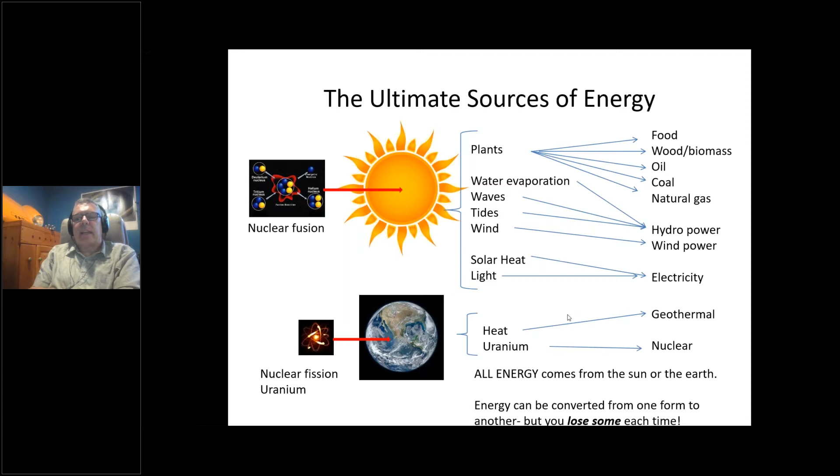So as we're probably all aware, there really are only two sources of energy that we humans can access. One of them is energy from the sun, either today or from a historical sun. And the other is from the energy of the earth, whether that be the materials of the earth like uranium, or the primordial heat of the earth, such as what we harness with geothermal energy. And the good news is we have this giant fusion reactor in the sky at a nice safe distance of 93 million miles away. So we can take advantage of it, or we can take advantage of the energy that it put up for us, or nature stored for us, over a long period of time. But this is really the ultimate source of all the energy that we use.

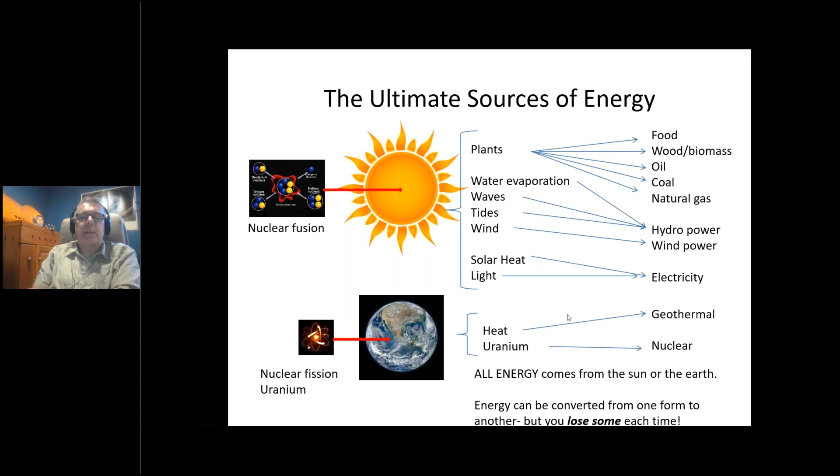And as we know, we can't really pull energy from nothing. We can convert one form of energy to another, but every time we do a conversion, we lose something. And so the laws of thermodynamics determine the transitions that we're permitted to do. And as I've said here, the zeroth law is that there's only one game in town, and you have to play it. There's no other game to play. And the first law says that you can't win. And the second law says that you can only really break even on a very cold day. And the third law, of course, says that there's an absolute zero, so it never really gets that cold.

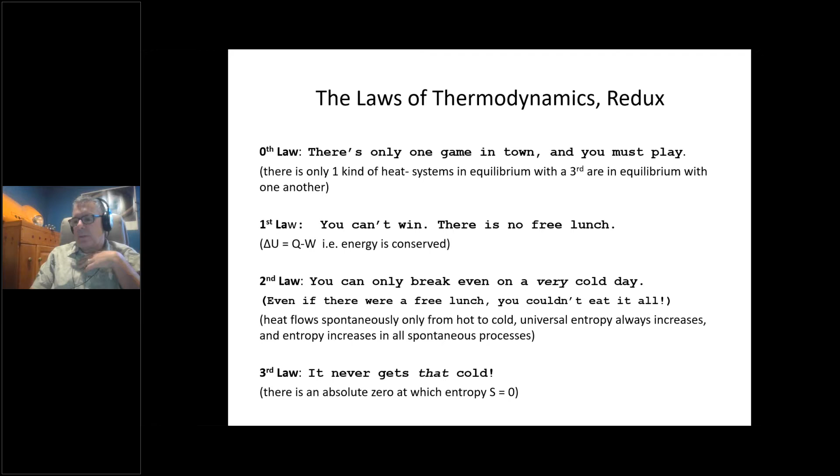So these laws are so fundamental and universal that, and what's fascinating about them is that they were discovered before we understood why they were true. So that frames all of our dealings with energy. We have to deal with energy in the context of the laws of thermodynamics.

Originally, we people had access only to the energy of our bodies, and as machines, we're about 15% efficient at converting food energy into mechanical work.

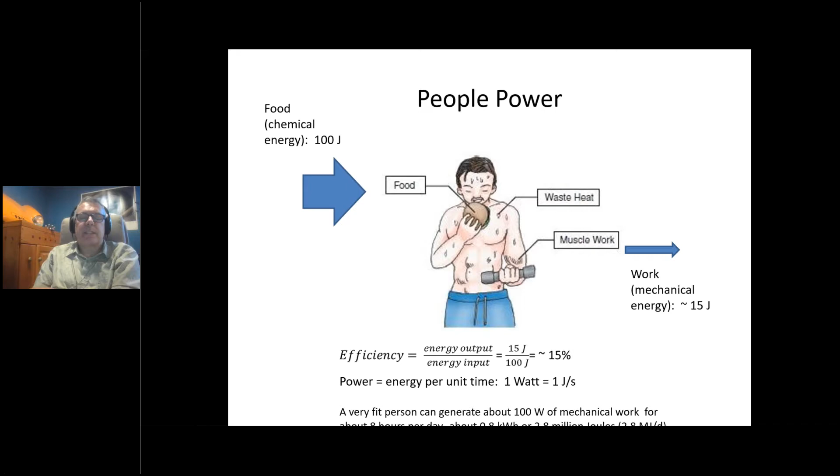We can be more efficient or less efficient, but it depends on the definition. For the largest part of our history, we only really had access to about 100 watts of mechanical work for 8 hours a day from each person. And that's it. That's all we had.

But eventually we got smarter, and we learned to exploit animals. Each animal is about 7.5 people. So one person could now take on the power of, say, 4 horses and use them for whatever needed to be done, moving things, digging, plowing fields, or whatever was needed. That was a huge improvement for us.

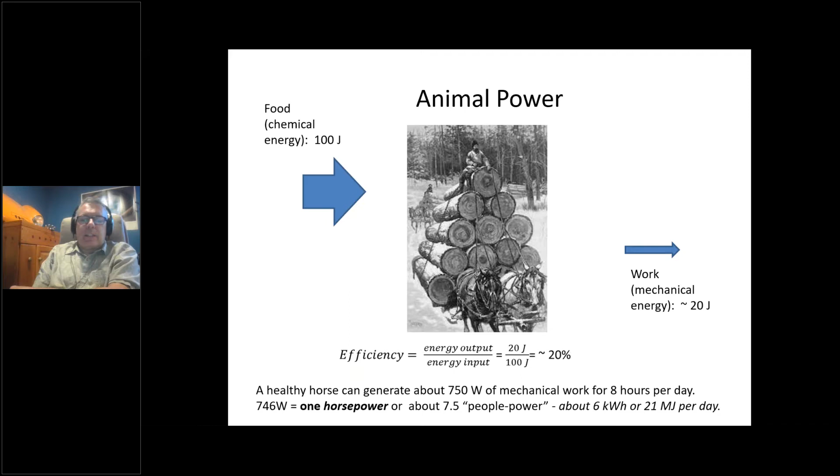As we learned to exploit the power of animals, we enjoyed that a lot, and used it more and more. The animals are around the same efficiency as humans, on the order of about 20% efficient. But the problem with horses or animals in general was mass consumption.

If we look at a city like New York City in the late 1800s, early 1900s, there were 175,000 horses in that city, with 2 million kilograms of manure per day. They were piling it high, several stories high, and shoving it into the harbor. The problems of horses in major cities were monstrous.

There was also a lot of people killed, they were quite dangerous, and their energy sometimes was not harnessed in the right way. Of course, horses also die, and when a horse dies and lays in the street, removing it is really a challenge. So the trouble is, horses make perfect sense in an agricultural environment where you can grow their food and the manure fertilizes the land. But when you try to put them in big cities, massive consumption equals massive problems.

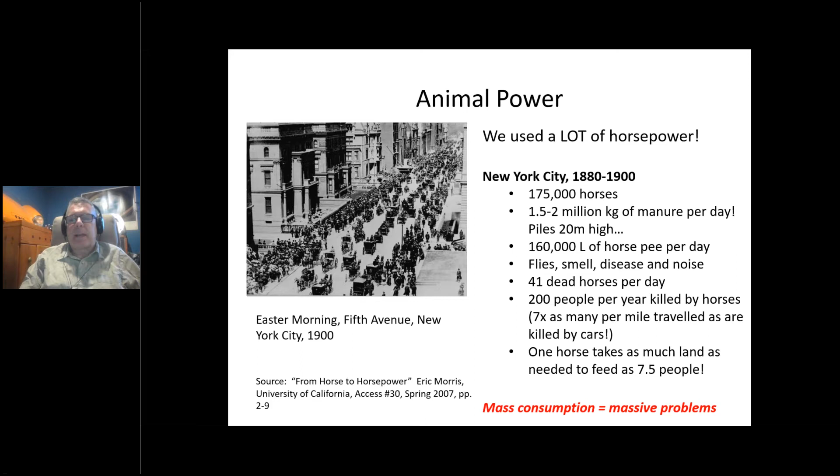So in the early 1700s, we started to effectively convert heat into work by means of heat engines. If you look at Newcomen's original engine, it was less than 1% efficient. But despite being only 0.7% efficient, what it did was miraculous, it removed the limitation of sustainability from our consumption of energy.

In the past, we were totally tied to either the sun or energy from plants derived from the sun. So we had to balance the desire to be warm in our homes against how fast trees could grow. That limitation of sustainability was a big issue for us.

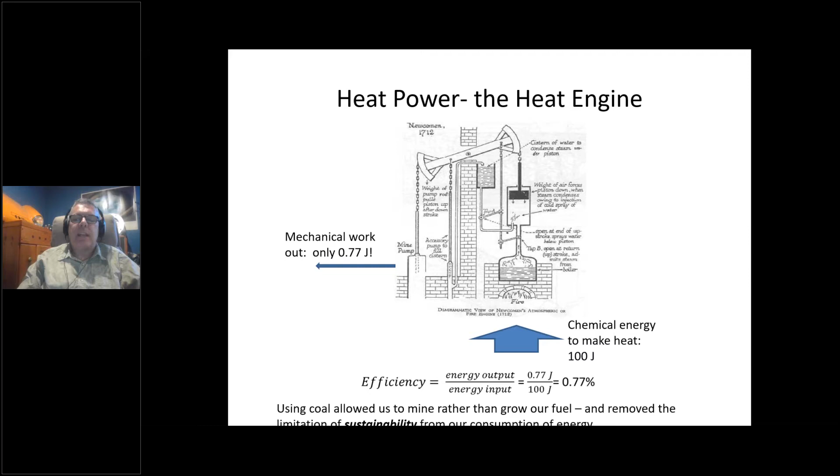Once we could mine coal, and in fact use steam engines to pump the water out of the mine so we could mine even more coal, we had a recursive technology for the exploitation of energy, in, unfortunately, an unsustainable way.

When you think about a heat engine, the way I like to think about it is like a waterfall that we put a water wheel in. The height of the waterfall, or the distance between the hot reservoir and the cold reservoir, determines to some degree the efficiency we can achieve through Carnot's equation.

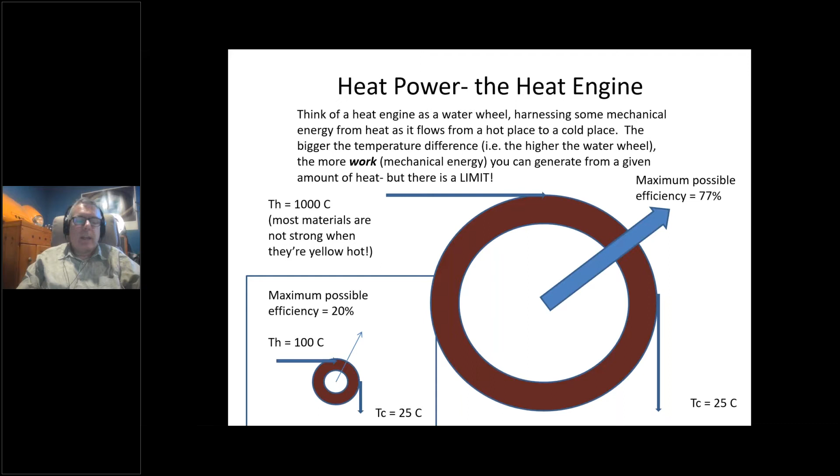But of course, that limit is a limit, and there's a limit based on materials of construction and so on, so you can only go so far. This is an amazing graph, a retired professor in Alberta put this graph together, and I kind of updated it.

This is the progress of heat engine efficiency versus time. The dashed line up there is an arbitrary 77% per Carnot, and we're already getting to 60% with combined cycle power plants. Even with large engines like ship engines, we can get to above 50%.

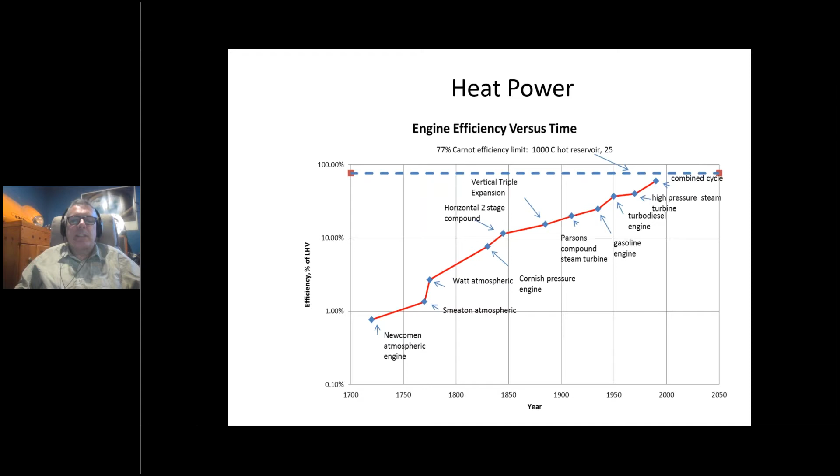It's really incredible. Another thing to notice in this graph is the giant jump between Smeaton's engine and Watt's engine, this is a logarithmic plot. So you can see why, even though Watt did not invent the steam engine, many people concluded that he did, because he made it so much more efficient than what was there before, by such a large measure in such a short period of time.

If we look at the gasoline engine, it's kind of the definition of the willingness of people to trade efficiency for effectiveness. The gasoline engine is not very efficient. We've managed over the years to make it more efficient, but it still really is not very efficient.

If we start with 100 joules and feed it to a typical internal combustion engine of the size used in a car, not in a ship, we're lucky to get 20.5% out the back end.

We lose about 18% or thereabouts just making the fuel, making the gasoline. And then the balance is lost by the engine as heat. It's rare that we tolerate processes that are so inefficient. But the reason we tolerate it in this case is that its efficiency is poor, but its effectiveness is really great. It's a liquid fuel, easy to transport, easy to store, easy to transfer quickly into the tank so you can refuel quickly. So it's the triumph of effectiveness over efficiency.

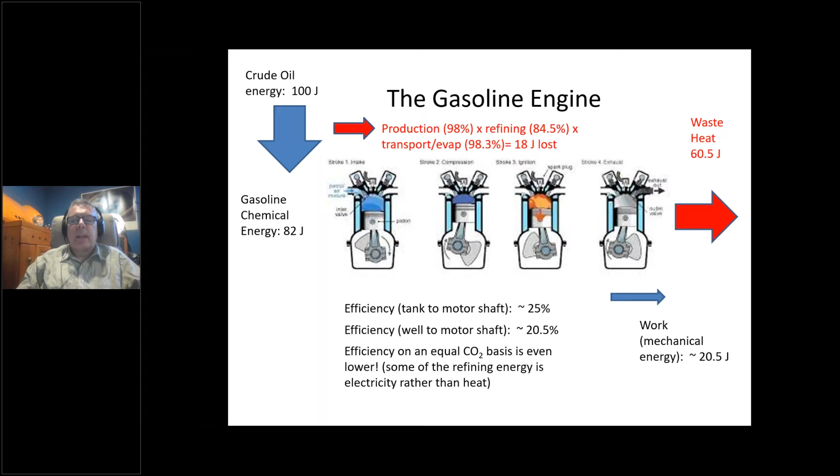And if we look at the various uses of energy in a vehicle, you can see the engine is by and away the largest waster of energy. In this instance, per this figure, 77% is lost as heat by the engine.

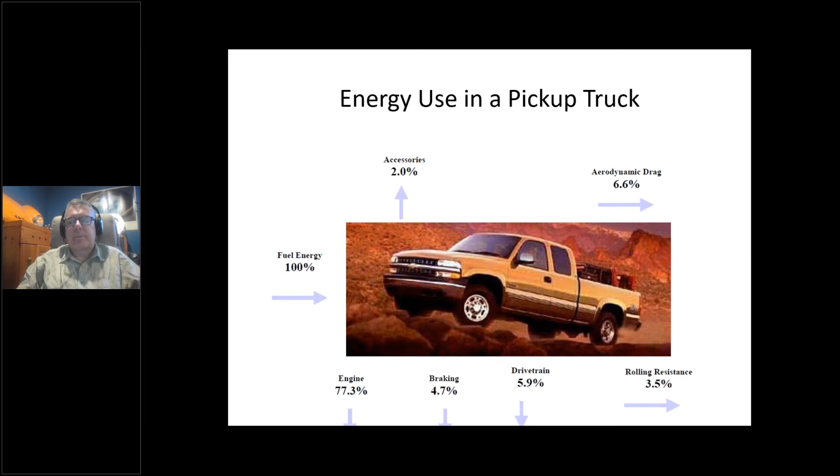But of course, the car, just like the horse, was a miracle. And I like to tell this story in the context of my father. My father was born in 1915, and he passed away in 2015 at 100 years and 1 month old. And you can imagine how different the world was between when he was born and when he died.

But when he was a young fellow, they were still plowing the fields on the farm with horses. And when he saw his first gasoline engine tractor, he was just completely amazed by this thing, because when it broke, you could fix it. You didn't have to shoot it. With a horse, if it steps in the groundhog hole and breaks its leg, there's no healing it. It's the best you can do is maybe use it as food, or send it to the glue factory, but the utility is gone, and they were also very difficult.

They didn't like to go where you pointed them. If there were two horses walking together and one had to walk in the soft part of the field that had already been plowed, and one got to walk on the hard part of the field that hadn't been plowed yet, that was easier. So both horses wanted to walk on the hard part, and they kept pulling and pulling. You had to keep pulling them back. So this car, this tractor, which went where you pointed it, was like a miracle.

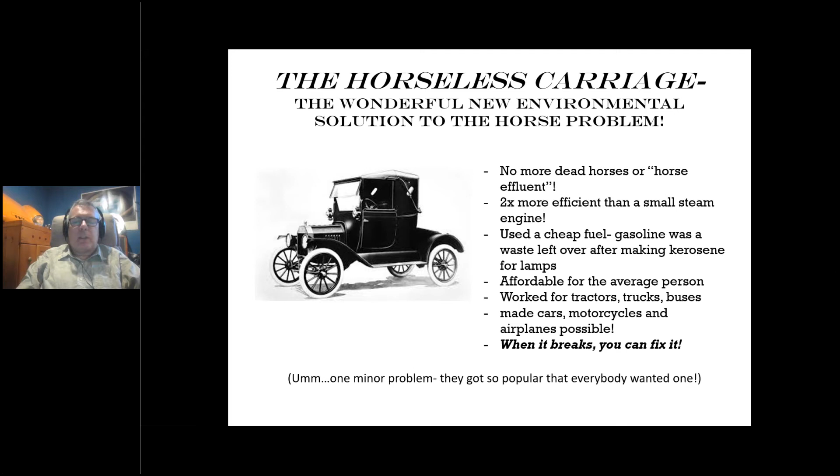So my father decided, this is the future. I'm going to become a mechanic. And a lot of people concluded the same thing. And of course, the mass exploitation of cars became the problem.

Well, here we are. At the same time, around the time my father was born, electric cars were as popular as gasoline cars. And in fact, they were the fastest thing on the road too for some time. As you can see, this Belgian fellow with his car that he called the Never Satisfied, La Jamais Contente, went as fast as 66 miles per hour at the turn of the last century. And the peak sales were about 200,000 electric vehicles. But of course, the superior technology of gasoline won in the end, because battery technology was just not up to the job.

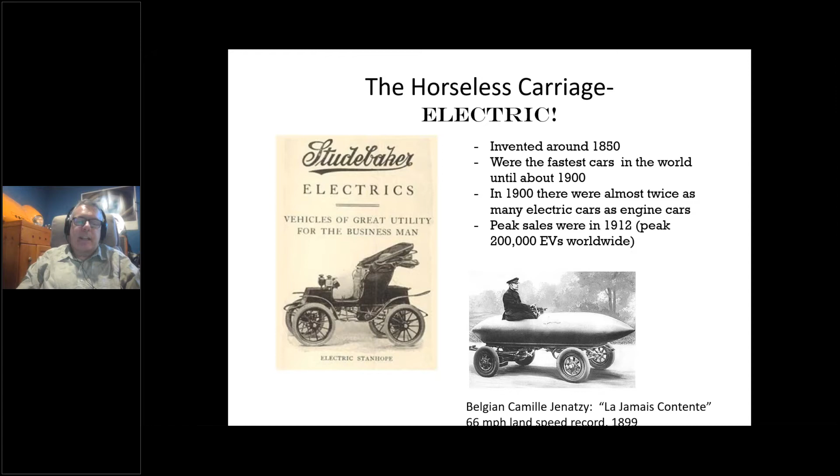When we look at the electric car, the amazing thing about it, though, is efficiency. Remember, we were talking about from energy source to wheels, or not to wheels, but to motor shaft. In the last example, we were talking about 20%. Well, this is now almost 75%. And even if we have to make the electricity from a fuel by a combined cycle power plant, it's still 42%. So we're talking about a gigantic gain in efficiency. And the nice thing about gains in efficiency is they mean reductions in cost ultimately, but they also mean reductions in environmental impact. And that's the real benefit of electric cars.

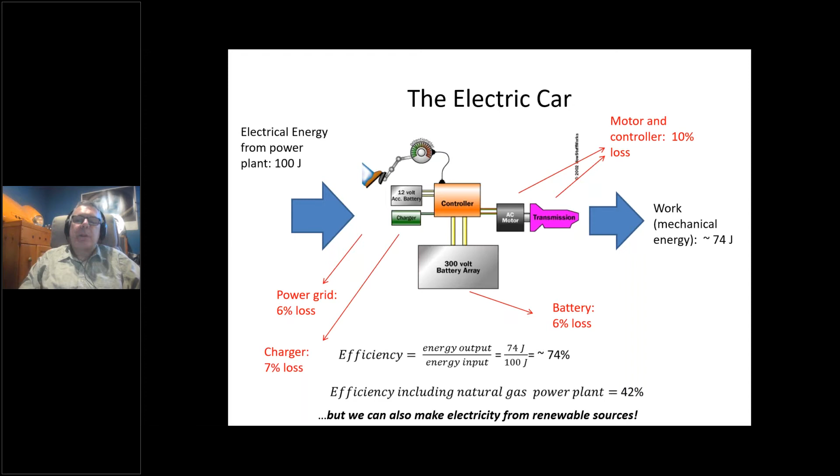Now, the big competitor in recent years has been hydrogen. And as a chemical engineer, I have a long relationship with hydrogen. Hydrogen is an old friend to me. I've been making and using hydrogen for 30 years. And the problem with hydrogen is that it's hydrogen. Unfortunately, hydrogen's properties as a molecule and its thermodynamics limit how effectively it can be used as a fuel, whether that be for heating or for transport.

Many people say it doesn't matter because in the future we will make electricity from wind and solar so cheaply that it doesn't matter if we make it efficiently. The trouble is, of course, that efficiency goes to cost, and all of these steps have capital associated with them, which makes them costly. So the trouble with the electric car fueled by hydrogen instead of by recharging a battery is its poor efficiency leads to high cost.

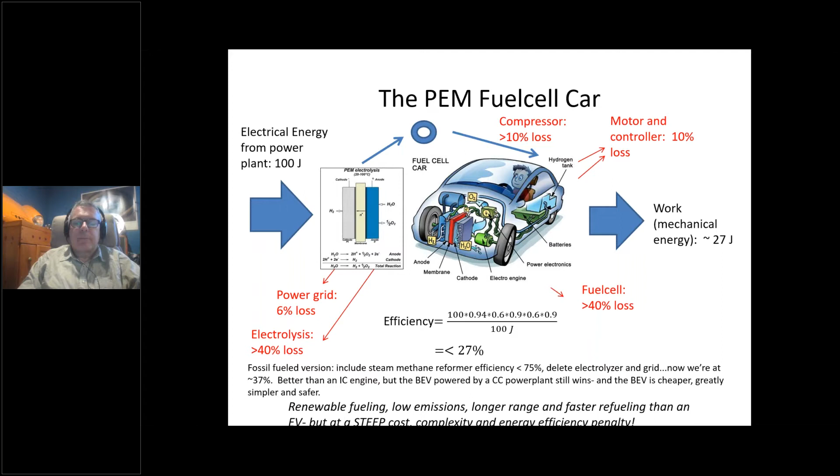So why did the electric car fail back in the 1910s and 20s? Well, originally, when there were only 20 good miles of road in the whole community, it didn't matter to have a range longer than 20 miles. It made no difference. But once they started building roads and better roads and making them longer, range started to matter. And the great thing about gasoline is its energy density per unit mass and volume is exceptionally high, despite the poor efficiency of the engine.

And it's also very effective, as mentioned—you can distribute it very easily. So in North America, every little corner store in the countryside became a gasoline station overnight. And all of a sudden, everyone wanted a car, and Henry Ford's mass production ensured that they could afford one if they wanted it.

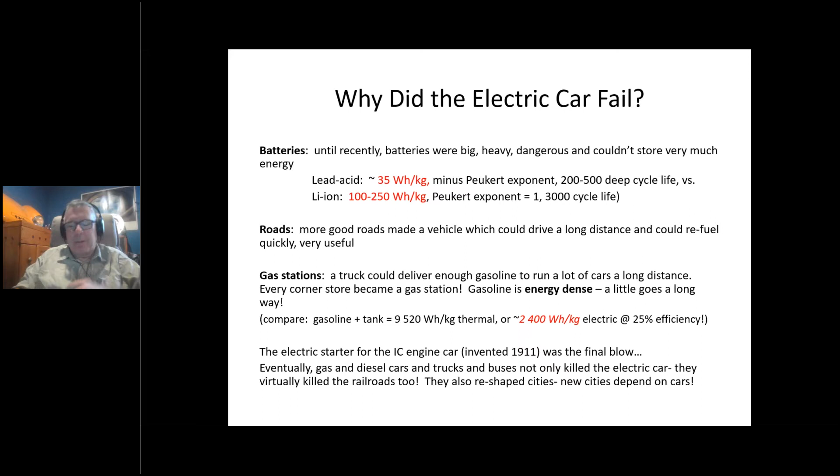And the final blow, actually—electricity, in a sense, had a hand in killing the electric car, because the original cars were started with a crank. If you did the cranking wrong, you would break either your thumb or your wrist when the car backfired or started and you didn't disengage the crank quickly enough. So a lot of people, especially women at the time, were not comfortable with an engine car. But then the electric starter in 1911 meant that you could just push a button and the car would start, and the rest is history, as they say.

So why do we need the electric car now? What's changed? Well, the big thing that's changed, the huge invention that made the electric car now make some sense, is the invention of the lithium-ion battery. And it's really two things: one is the lithium-ion battery technology itself, and the other is the fact that we have these little devices.

Cell phones and laptops and so on, mobile devices, were so valuable to us that we were willing to pay $3,000 per kilowatt hour for the initial batteries when lithium-ion was invented. And that consumption of very high cost batteries initially allowed the production of those batteries to increase, and they provided what's called a path to scale that ultimately gave the lithium-ion battery the possibility of becoming cheap enough that you could imagine using it in a car.

But the real motivation here is climate change. We really need to deal with the emissions from burning fossil fuels. We didn't know about that officially until about the time I graduated from university, about 30 years ago. But for the past 30 years, we've known and we've done nothing, or almost nothing. And the electric car gives us an opportunity to do something without paying too much of a cost for doing so.

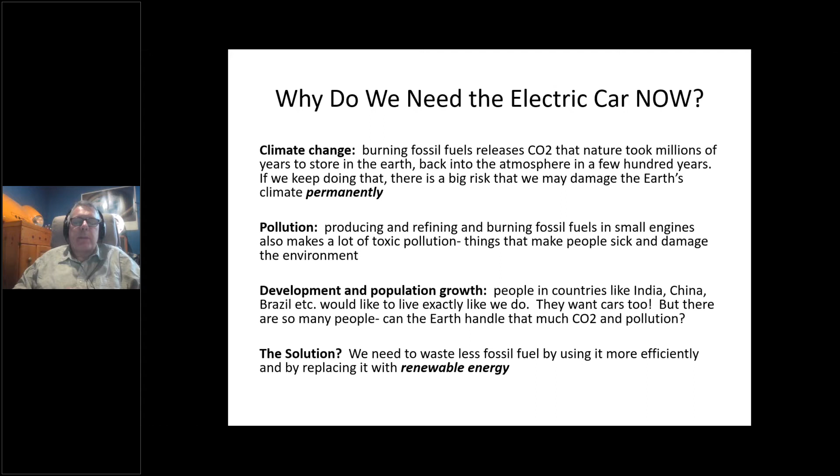Of course, the other thing is that right now we're exploiting cars, but there's a huge fraction of the population of the world that has no access to that technology because it's too expensive, and they would like it. If we expand the role of cars in the world to the entire rest of the world, as one would expect we ultimately should, the burden of fossil fuel emissions and toxic emissions would be tremendous. So ultimately, to deal with all of these problems, we need to transition to renewable or non-emitting forms of energy, and the electric car's efficiency greatly helps with that.

This is reality, so we have to cope with it. We had a great party for 300 years on the stored energy of the sun in the form of fossils, but the party's now over, and we have to sober up, clean ourselves up, stop mourning, stop denying it or bargaining with the problem, and get on with solving it. Electric cars are definitely part of that solution.

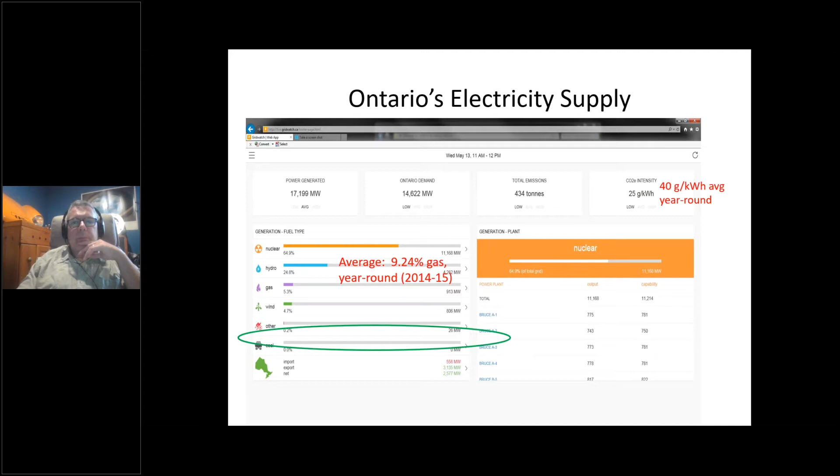Of course, I'm very fortunate. I live in Canada, and 80% of Canadians have access to a grid like mine or better. My grid is only 40 grams of CO2 per kilowatt hour because it's mostly nuclear and hydro with a little bit of wind. What remains is natural gas at a fairly small percentage, about 9% year-round average, and no coal. We burned our last coal in 2014. So in Canada, we have a beautiful grid, and that makes electric vehicles, when you have a grid like this, which is the envy of the world, really become an obvious choice, what we'd call a no-brainer.

He does a very clever set of evaluations looking at what the transition to renewable, non-emitting, or sustainable energy will take. He calls it Sustainable Energy Without the Hot Air, and it's a refreshing look. Although he does do one thing I think is quite wrong: to make the analysis simple, he takes every bit of energy, whether heat or work, and converts it all to joules, or kilowatt hours per person per day. By doing so, it's almost like he's committed what I call the first sin of thermodynamics. He's sinned against thermodynamics because heat and work have the same units, but they're not worth the same. It's like comparing American dollars and Jamaican dollars just because they're both dollars. They're not worth the same.

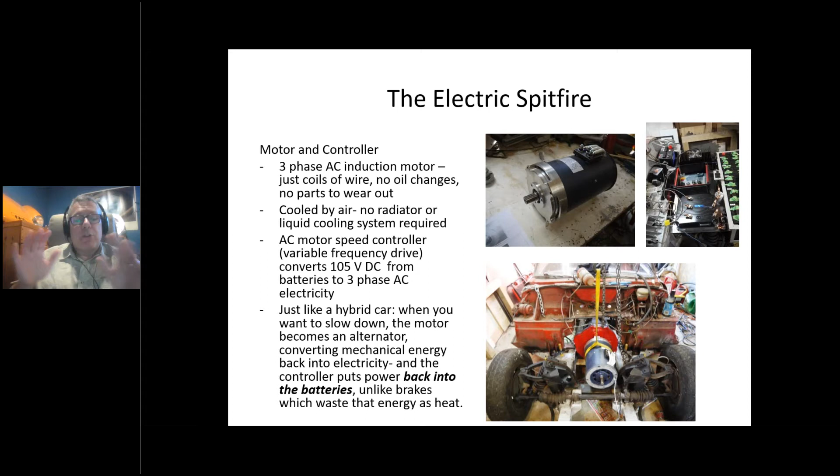Being a chemical engineer, of course, I was very interested in the batteries. One of the things I wanted to do for the project to be considered successful was to ensure that I got good data out of the energy efficiency performance. So I made sure that I could accurately measure how much AC electricity went into the charger and how much DC came back out of the battery, so I could do accurate calculations.

The beauty of lithium-ion batteries is that they're extremely efficient. They're higher than 90% efficiency once all the ohmic and polarization losses are figured in. The other great thing about them is that the process is very gentle. It's just lithium ions moving from the anode to the cathode and back again. The volumetric changes in these materials between charge and discharge can be managed such that they're not very great, and as a consequence the battery can last a long time.

At the time, my batteries were warranted for about 2,000 to 3,000 cycles before they lost 20% of their capacity. Some that I bought recently for a solar project up at my farm were rated for 4,000 cycles. So the cycle life of these lithium iron phosphate batteries is really quite exceptionally good.

When you look at what the batteries look like, they're layers of anode and cathode with a plastic separator between them, and that space is filled up with an organic solvent that has lithium hexafluorophosphate dissolved in it, and the lithium moves between the anode and the cathode and back again between charge and discharge.

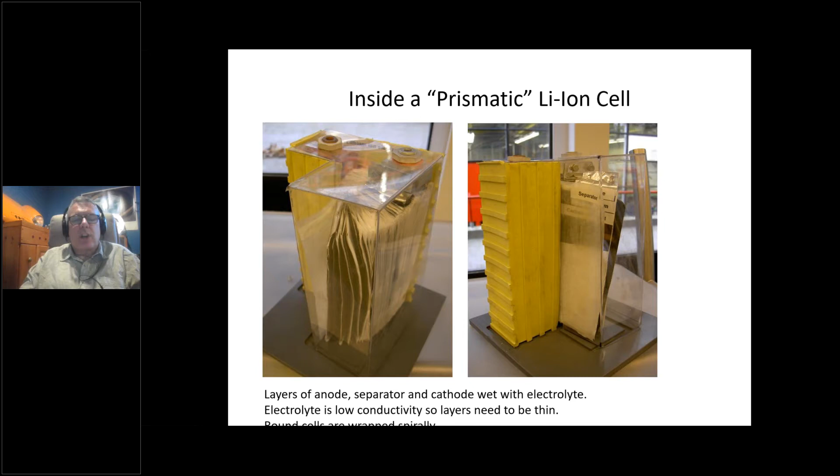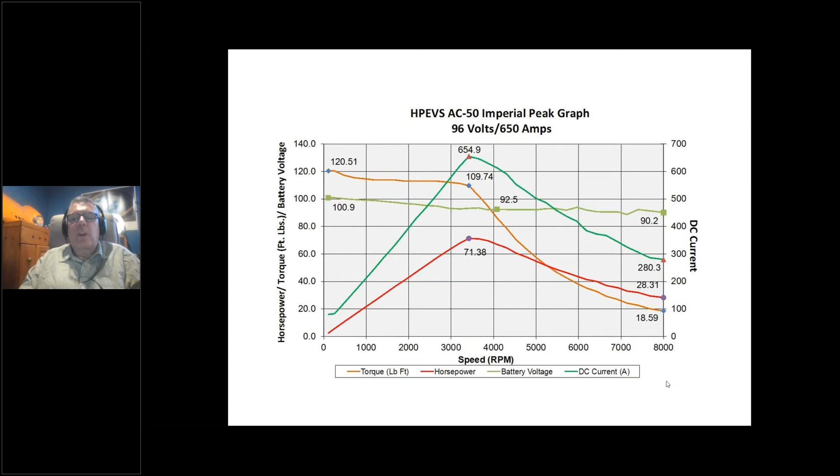So here's kind of the key slide from the point of view of the decarbonization guy, from my perspective as somebody really interested in energy. I compared the gasoline engine Spitfire, the original one with its 1.5 liter Leyland engine, against both my Prius and against the car converted, which I called the E-Fire. You can see that the energy used from source drops rather dramatically by virtue of that efficiency, and the CO2 emissions from source drop by 97%.

I mean, that's just incredible. It's not zero, but it's pretty close. So imagine, and that's comparing it to this Prius - I own that car, and that's my real performance. It's 94% better than my Prius, which is the best gasoline engine car you can buy in Canada that doesn't also have a plug. So there's no comparison here. The performance is absolutely incredible.

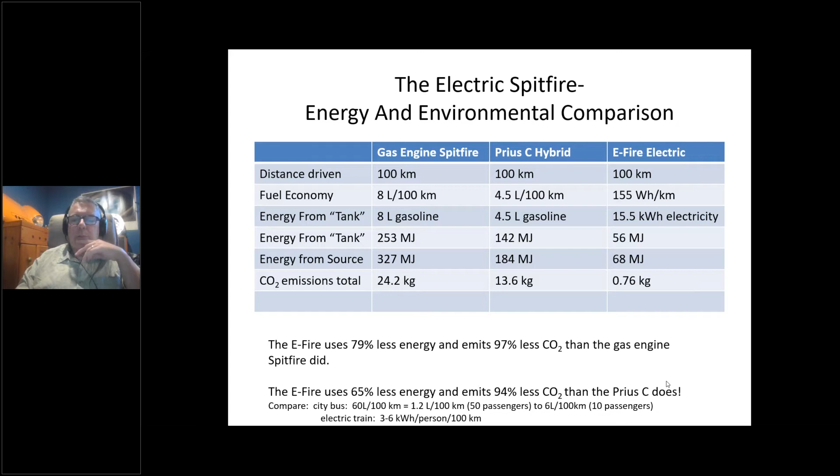On a money perspective, without carbon taxes, it's still a little bit hard to justify, but that's why the government gives some incentives if you buy new proper electric cars. Of course, they gave me nothing because this conversion process is not something they really care about or approve of. They're really interested in people buying cars from Nissan and Tesla and companies like that making them.

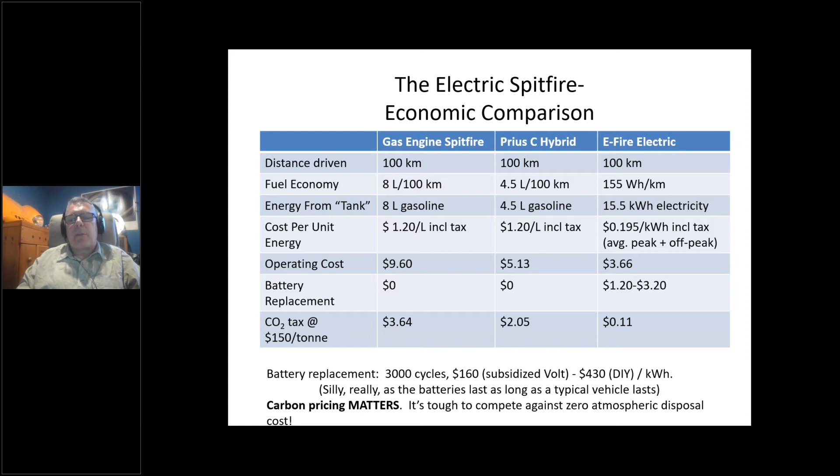So here we go. Here are some pictures of the progress of the job while we were doing this.

This is in my garage at home, and you can see it's not very neat and tidy, but that's okay because we are all about results here.

So here I'm pulling the engine. My son is helping me disassemble things. He was 11 years old at the time.

And there I'm holding the gasoline tank. Imagine this 80 pounds of gasoline, 10 gallons, around 40 liters, was right behind the seats of the car and separated from the driver and passenger by about a 3mm thick piece of paperboard with some vinyl covering on it. And it had a flip top lid with just a little clasp to hold it down.

So getting rid of that gasoline tank made me feel a lot more comfortable in the car. But of course, remember, this car had been sitting outside underneath the tarp for a long time, so it was in very bad shape. So the very next job after we got rid of the engine was we had to lift the body tub off of the chassis or frame in order to restore both the body and the frame.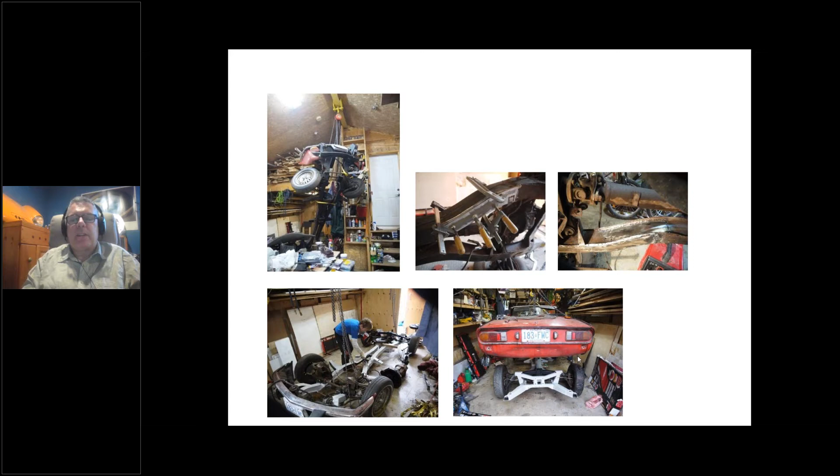And there my son is painting the chassis with epoxy. And then we had to put the body tub back onto the frame, because the body tub was in even worse shape than the frame.

And by this point, one of my problems is that I'm kind of a cheapskate. I don't like to spend money unless I have to, and sometimes I'm foolish that way, and I spend effort instead of money. So whereas you can buy some of these body panels still for these cars, I had to do the hard thing of bending little sheets of steel and welding them together in order to do these body repairs. I made my own floor pans for the car to replace them because they were completely gone.

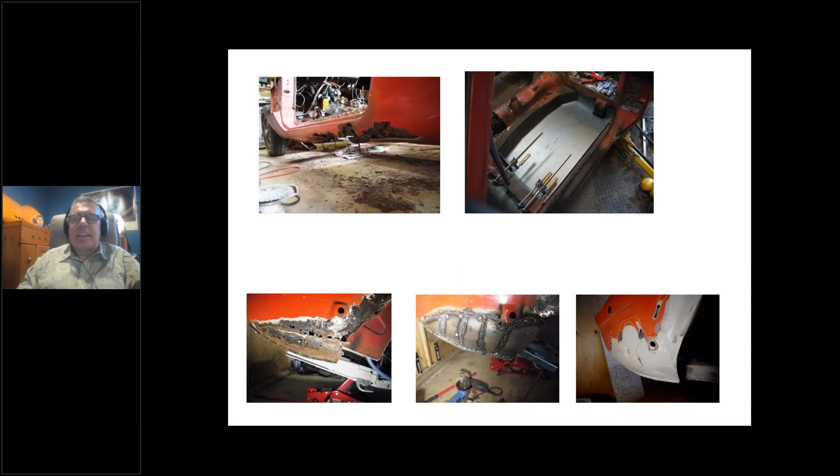And you can see lower portions of the car were in very bad shape. They'd corroded away. In fact, this was a repair that someone else had made, and they didn't understand chemistry very well, because they used bronze to braze in the repair, and then the bronze and the steel set up a galvanic corrosion cell and corroded away the steel over the subsequent years.

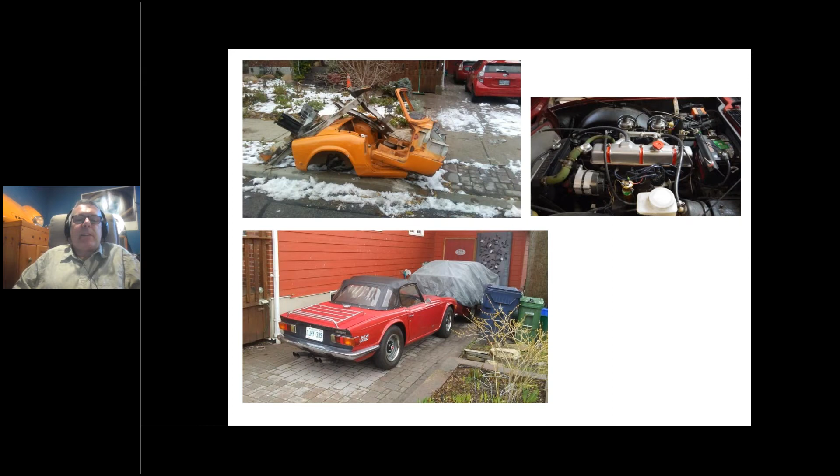Of course, cutting the car up into little pieces so that the scrap dealers who rove around the neighborhood would come and pick it up - that was one of the most hurtful things that I did. And if you're attentive, you'll notice in the background there's a piece of the hood of the car up in my office here.

But as things would have it, by luck, none of the electric stuff in the car was damaged at all - it was in perfect condition after the crash. And on top of it, I managed to get a settlement from the insurance company that allowed me to keep the car. So all of that electric stuff just sat in my garage.

And then I bought another British car. Being kind of foolish and in love with British cars, I bought another one - a 1973 Triumph TR6. It had a great big 2.5 liter straight 6-cylinder engine in it, which of course promptly killed itself, and I wasn't interested in fixing that. So I decided I was going to convert it.

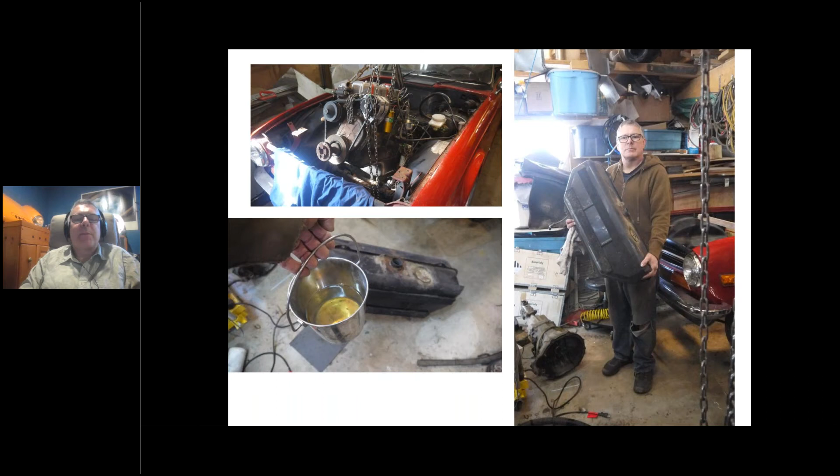So guess what - we did the whole thing again, only this time with a TR6. So here comes out the engine with the transmission attached, and this engine weighed a lot. This was a giant cast iron behemoth.

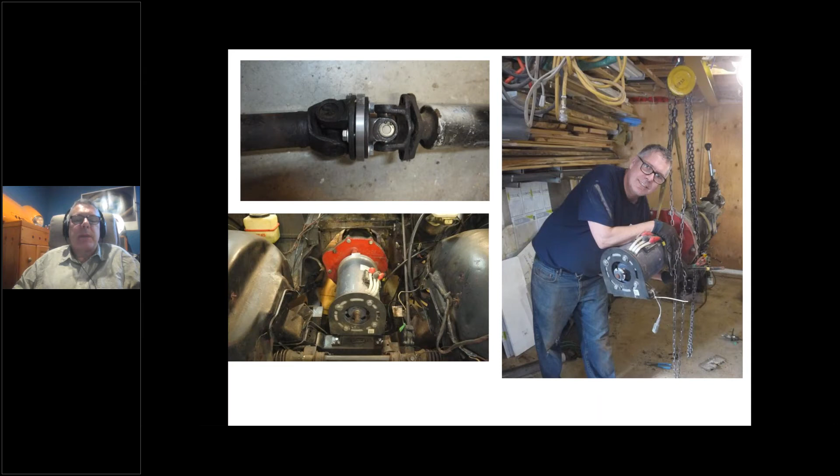The great thing was that the cars were actually very similar, despite the TR6 being much larger and more powerful in terms of having an engine. So in fact, I only had to make this little plate here to adapt the drive shaft to the differential of the TR6, and that allowed me to basically drop things in just like in the other car. And in fact, even this cross member that was underneath the engine was in pretty much the same position as the one in the Spitfire, so dropping it in was really simple.

And so here I am with the drivetrain. There's a guy on LinkedIn, an engine advocate, who liked to post pictures of people hugging their engine. So I hugged my electric drivetrain and sent the picture to him just to make him angry. But otherwise, we did very similar things.

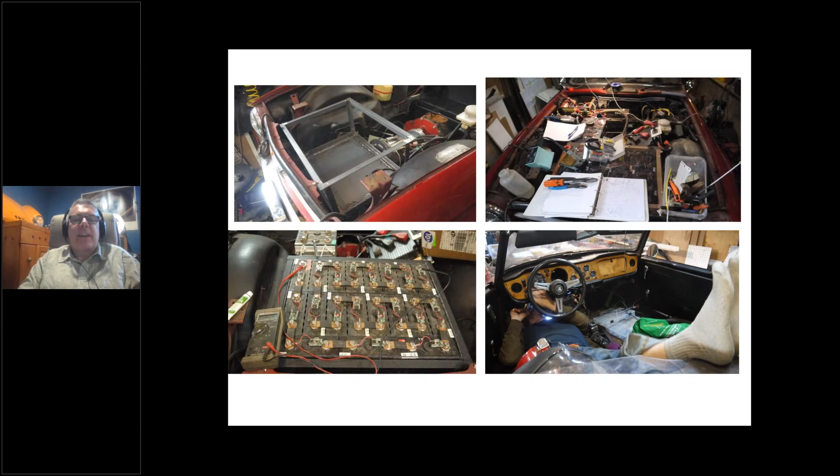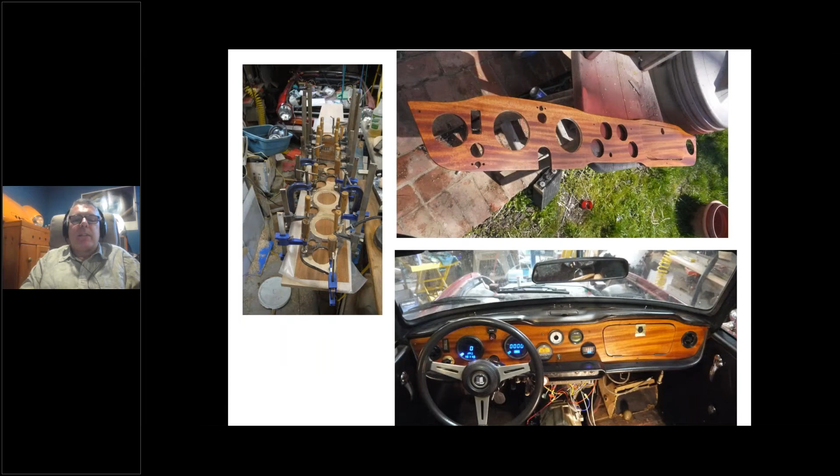This time, battery box in the front, just like before, but I wanted the motor to be more visible. And then you can see the pictures of all of the wiring work that had to go on, and the front battery pack being wired together. And then here in the bottom right, this is a yoga pose that's called upward facing electrician, that every British car owner knows at some point in his life, and I've known it several times now because of course I had to rewire the whole car. The dashboard had been destroyed, so I veneered it with some very pretty mahogany and put all the gauges in place, and rear battery pack just dropped right in just like the old one.

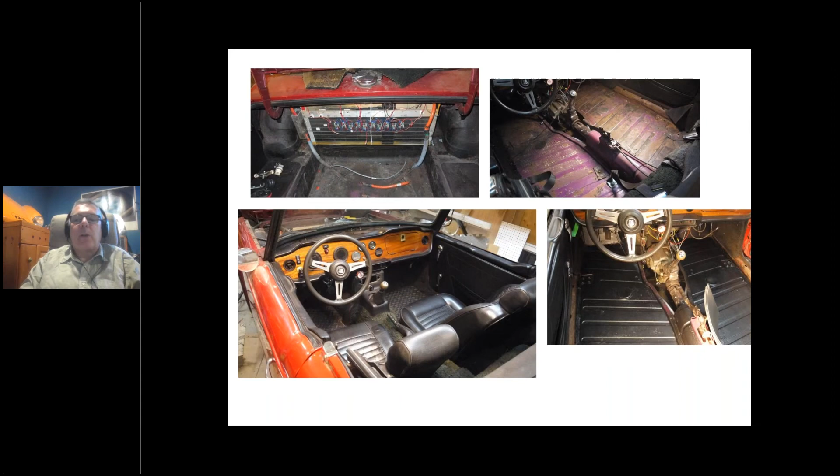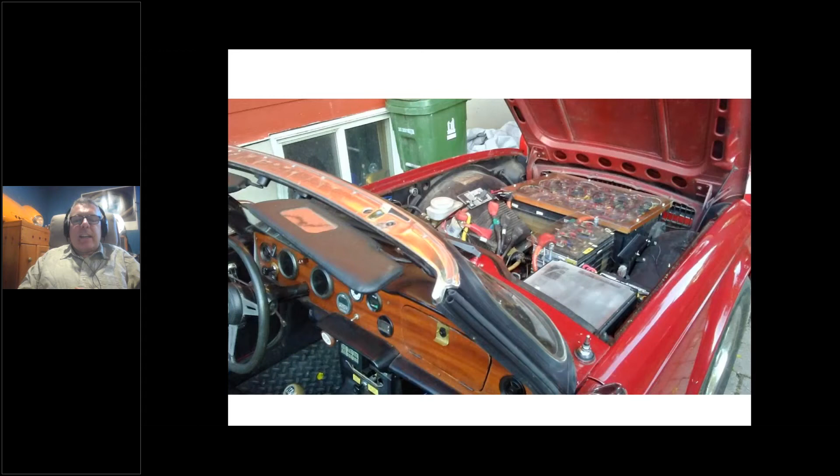This car was in much better shape, so there was no bodywork really needed, a little bit of fixing here and there. And here's the finished product. And this one, basically you look at it and it looks very much like an ordinary TR6, but it's silent, it doesn't have that roaring engine. And there's a picture of the engine compartment, which of course startles everyone when you open it and they look at it, because they've never seen anything like it.

As I said, this is a project of great passion for me, and I hope that you found my discussion about it interesting, and I hope we'll have an engaging discussion in questions and answers. And that's my talk.

Yeah, thank you, sir. It was really wonderful to look at all this, and the step by step you have taken the things forward.